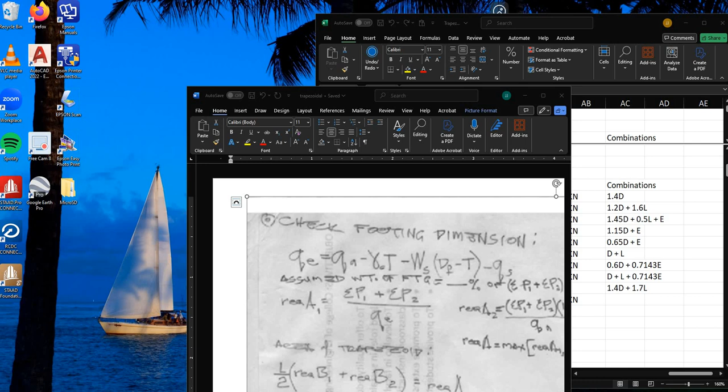Hello! Our topic today is trapezoidal footing.

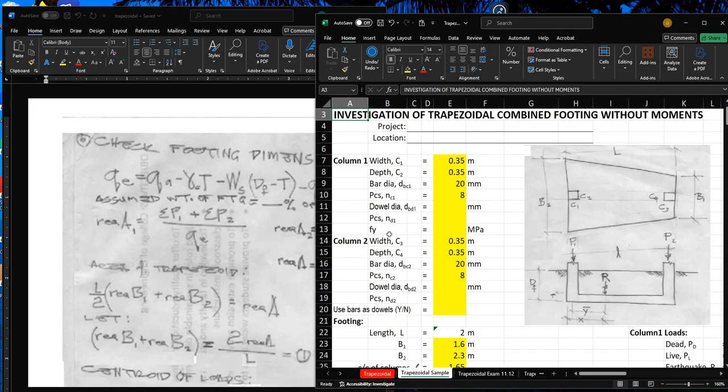This is similar to the combined footing. It also has C1, C2, DBC1, NC1, DBD1, ND1, and FY, and the same for column 2.

However, its dimensions include total length L, and then B1 and B2. B1 is the short dimension at column 2, which is at C3, C4. B2 is the one at column 1.

Then small l is the center to center distance between columns. You also have DF, or depth of excavation from the NGL, and the thickness of footing T.

Then bar Y is the centroid of the column loads. And small x is the distance of the reaction from the edge of column 1.

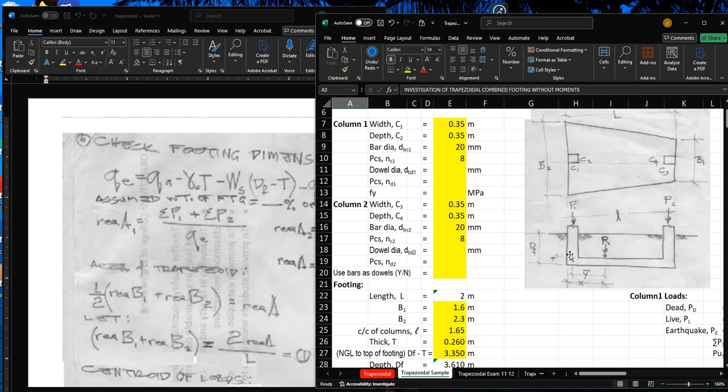Letter A represents the longitudinal top bars, located at the top. Then the bottom bars along the Y direction under column 1 are defined by DBY1 and NY1. Under column 2, this is defined by DBY2 and NY2.

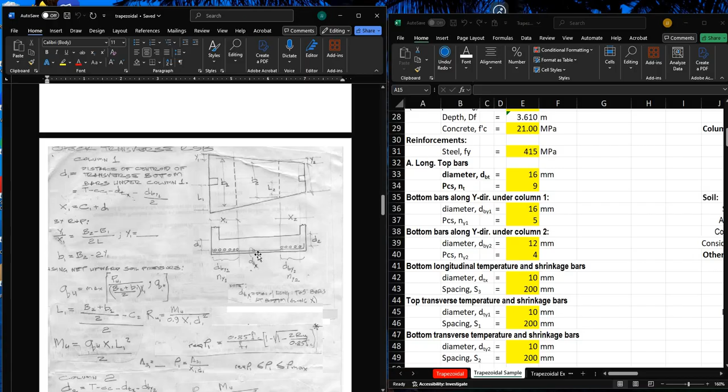Then we have the bottom longitudinal temperature and shrinkage bars defined by DTX and S3. We also have top transverse temperature and shrinkage bars, and bottom transverse temperature and shrinkage bars, DTY2, located in the middle as transverse temperature and shrinkage bars.

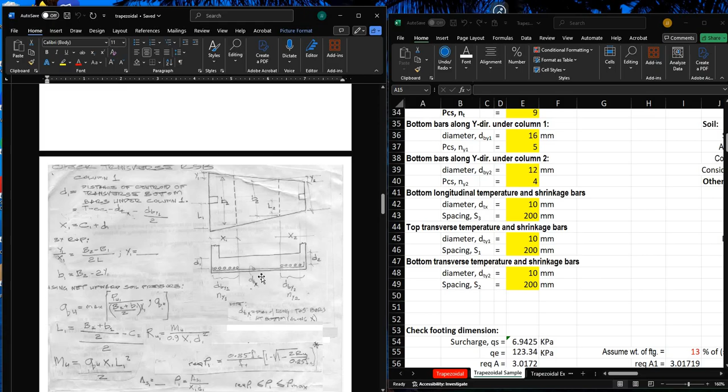For the loads, we have dead, live, and earthquake. We will be using the same combinations as before, coming from the combined footing and eccentric and concentric footing.

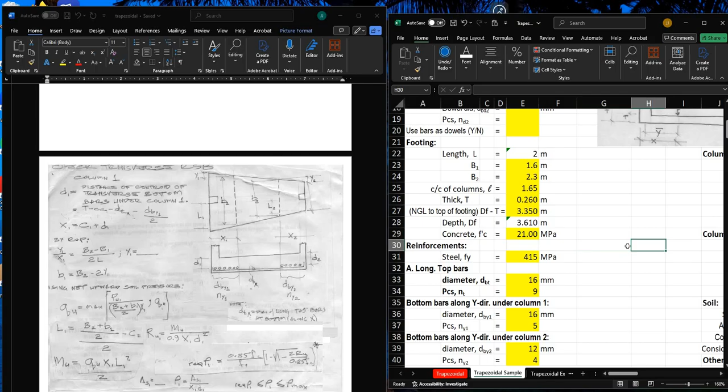And then the soil properties, and the surcharge values such as Q sub S, slab, and soil. You also still need to input the maximum aggregate size.

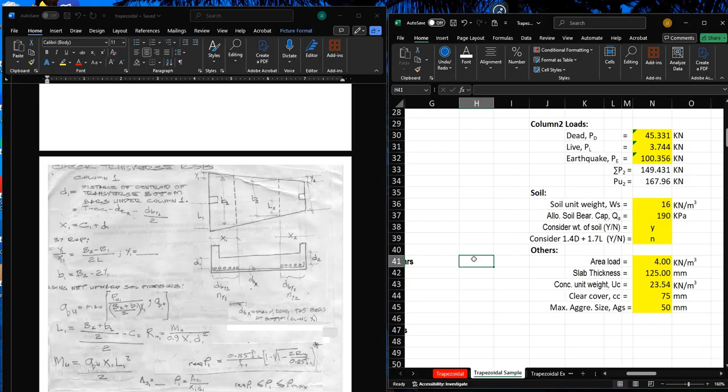Which leads us now to checking the footing dimension.

Q effective is equal to Q allowable minus unit weight of concrete times thickness, minus weight of soil multiplied by the thickness of soil, minus surcharge.

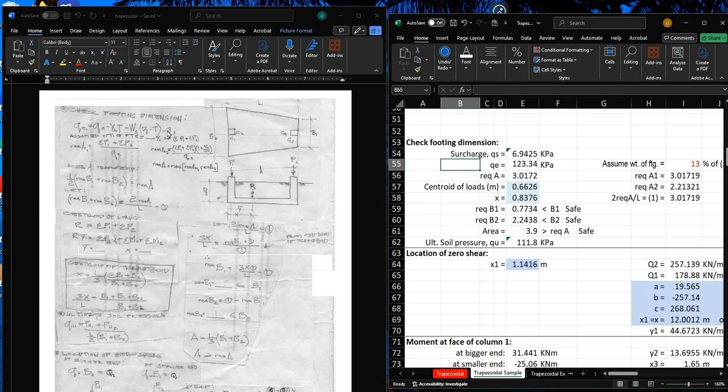We also have the assumed weight of footing, which is equal to a certain percentage of the summation of column loads. That summation uses the service loads, usually ranging from 5% up to 14%.

Our required area is taken from two conditions. Required area 1 is equal to the summation of service column loads divided by Q effective. Required area 2 is the summation of column service loads multiplied by the assumed percentage, then divided by Q allowable.

So the difference between these two: required area 1 uses Q effective, while required area 2 uses Q allowable. The required area is the maximum among these two.

Now these are the basic equations of the trapezoid. The centroid, from the edge of the trapezoid, which is x, is equal to L over 3 multiplied by 2b1 plus b2, divided by b1 plus b2. This is the centroid of the footing shape, and this is not dependent on the loads.

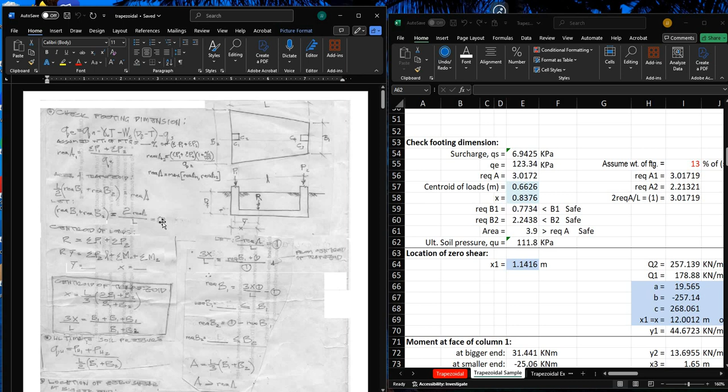Now, let this term be our equation number 1. So remember, equation number 1 is equal to 2 times required area divided by L.